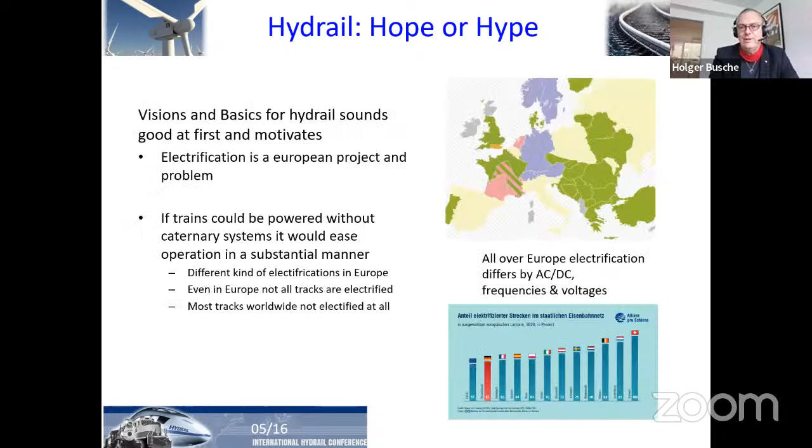But I just did an examination for a certain railway line in northern Germany, which is between two of the largest cities, between Kiel and Lübeck, and this line is about 80 kilometers long, which is equivalent to about 50 miles. I just calculated for this line how much renewable energy would be needed. So it's just one power station at that time.

How much would be the economic benefit for this, and how many trains will you have, as I developed a certain timetable for the railway operation, and so on. And is it possible to make the e-trains wireless, so going faster, better, and cheaper in comparison to a catenary system at the time? And even in those days, for the very few operations, so 2 trains per hour in operation over there, it would be cheaper, even with those prices of fuel cells at the time, to operate with hydrogen rather than building the catenary systems.

The thing about trains, in comparison to cars, is that you have a lot of advantages using hydrogen in a train, because the energy consumption of a train is much lower than of a car in comparison to their size. So that makes your technology easier to install.

The second thing is a car is just standing around more than 23 hours a day. So even if you install a quite expensive bit of technology into a car, and you just drive 40 kilometers a day, which is the average in Germany, of course this is more expensive than if you install something in a train, which operates 600, 700, 800 kilometers a day, or even more than 1,000.

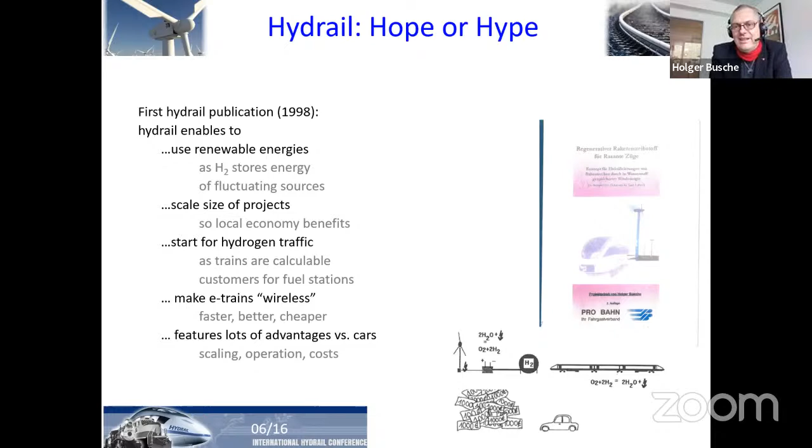Of course, you need less energy. This is also a second thing. Trains are always better than cars regarding energy.

The history. So actually, in the very beginning, I started by buying 2 old rail cars from the 50s, which had been operated by rechargeable batteries. The batteries were removed in the 90s in order to install a diesel engine. We wanted to have these 2 rail cars in some kind of competition between rechargeable batteries, of course new ones, since the older ones had been lead batteries, very, very heavy, and hydrogen.

So we started this in 2011 or 12. We got some first examinations and so on. I can show photos of these old rail cars, vintage rail cars. But nevertheless, 2013, 14,

Alstom came up with the idea of changing one of their standard diesel rail cars, the LINT 54. 54 stands for 54 meters of length. And they made up the project of having these converted to hydrogen. As you can see in the background here, a photo of those and the history.

So it started in 2014-15, and they had pre-series trains, again 2 of them, and started them on a passenger operation line close to Hamburg, which was part of the International Hydrail Conference in 2019. Then we had the start of the fleet operation, which was scheduled for the end of last year.

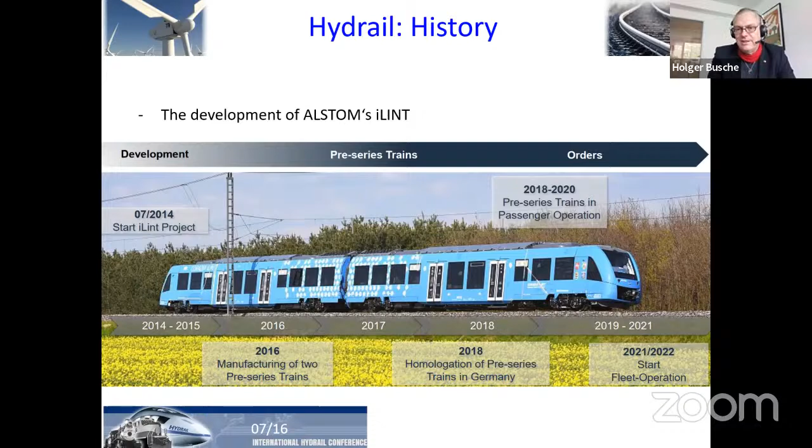And now next to Frankfurt, they're having a fleet in operation. They are facing problems; I will talk about this a little later on. But nevertheless, Hydrail is on the run. And we can see the first generation of hydrogen railways, which is this iLint. You see this is Lower Saxony, with Hamburg here at the top if you're looking at a map.

And what they are expecting is a range of 1,000 kilometers, with refilling taking just 15 minutes. You see some technical data in here, which you can see later in the presentations given to you. Of course, this is a hybrid, so they have a 110 kilowatt hour battery installed to shave the peak power demands, so the fuel cell doesn't have to cope with all these power changes in a short time, which fuel cells usually don't like that much.

Nevertheless, the homologation of the system was achieved. The train was in operation with a big opening, and on schedule with live passengers on that line.

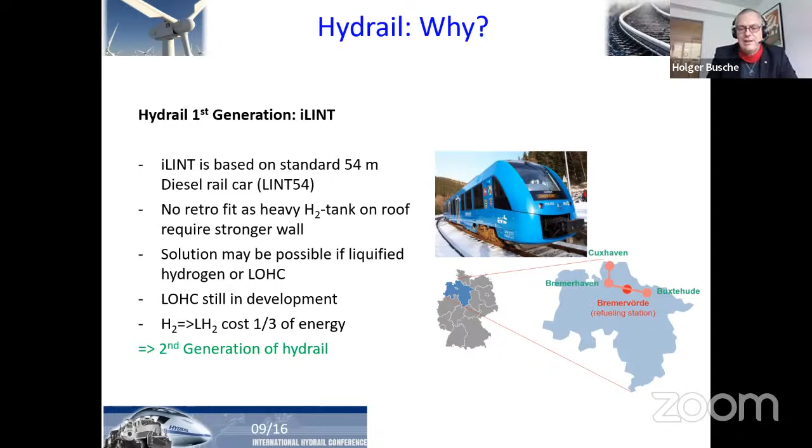A little later on came the second generation, the Mireo, which is a standard train of Siemens. Siemens is designing these trains on the basis of a standard electric rail car. So that's a difference. The iLint is originally a diesel hydraulic rail car, so there's no electric propulsion system in the original version, while this one is usually powered with a catenary system, which gives you quite some advantages because you have the electric engine and so on already installed.

Siemens developed both versions, the B standing for battery, or rechargeable batteries, and the H standing for hydrogen, of course. You see some more data in here. They're trying to achieve the same filling time, 15 minutes of refilling for hydrogen, and especially they are able to connect with the other trains of this kind of fleet. So a catenary system train should be connectable to those hydrogen trains.

So if you have a hydrogen line coming from a rural area, for example, getting closer to a metropolitan area where you have a catenary system, then you can just connect them and people don't have to change. It's just to connect the catenary system to this.

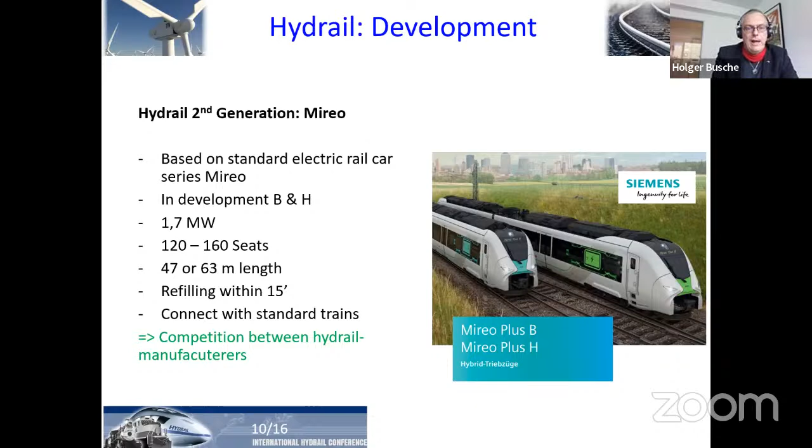This brings up the question: when should we use a catenary system, rechargeable batteries, or Hydrail? And the decision will be made by CAPEX and OPEX, of course. Usually it's the money that makes the decisions at the end of the day, in the long run, which in railways is usually decades.

Catenaries are, of course, the most powerful trains, but you have a high CAPEX. You have to invest a hell of a lot of money, which in Germany is something like 2 million euros per kilometer to install an overhead catenary system. And in North America, it's even much more than this, as the trucks are larger and all those kinds of problems you face over there.

So if you have low range needed, because you only have at the end a line of 20 or 30 kilometers that you have to cope with, then you go for the rechargeable battery because you can use the catenary system on the main line, for example. But if you don't have this and you have to go with your train on a longer run, then Hydrail is coming into play. And also here, the decision is made by the range and, of course, by the money at the end of the day.

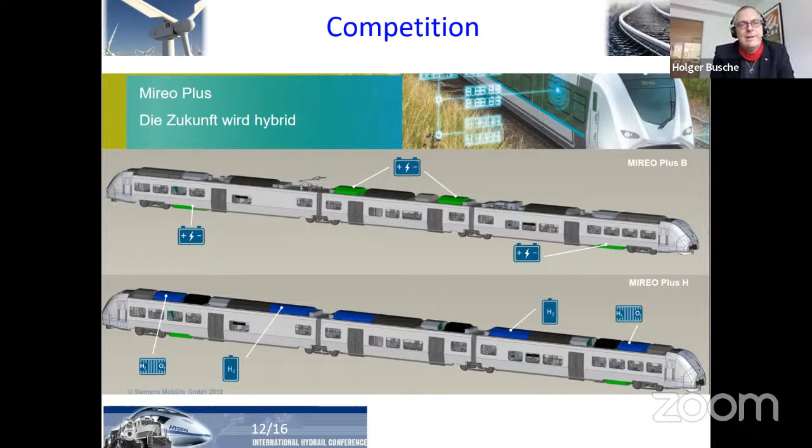So it's based on this question: how many kilometers do you have in between your catenary systems, if you have some? And the range is usually something around 80 kilometers. So you can fill up a gap between the catenary systems of 80 kilometers, or 40 kilometers return. The technology is also feasible. These kind of trains will be in operation in northern Germany, Schleswig-Holstein, starting this year. So it's coming up, and this question will be coming up more and more.

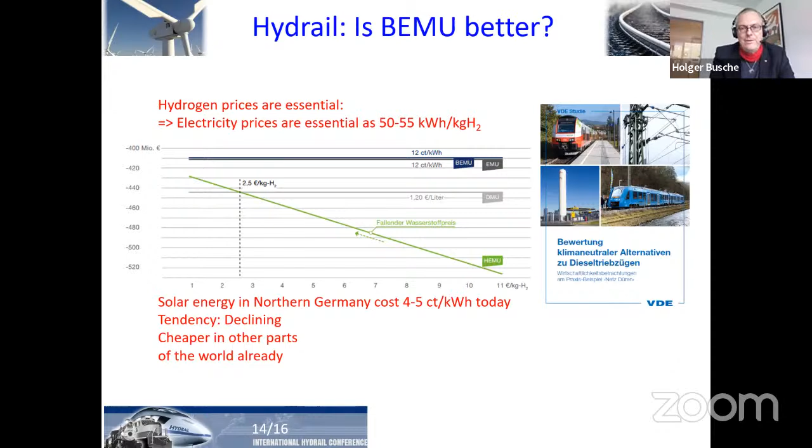And even the 12 cents per kilowatt hour for the catenary system is no longer the price that you pay today. So it's going to be interesting where this race ends up at the end of the day. So Hydrail chances in Germany are limited. This is due to the fact that 60% of the railway network is electrified, so it doesn't make that much sense to have a Hydrail train in operation underneath a catenary system.

Hydrail is facing a big problem, as hydrogen is not just an energy source that you can withdraw from Earth, like oil or coal. You have to produce it, and the capacity to do so is limited at the moment. So it won't be a problem in 2050 or so, but it's a problem now. And hydrogen will be urgently needed in different uses like the steel industry.

So today, if you have iron oxide to be reduced, you usually use coal, and that has to be replaced by hydrogen. And you can imagine that a steel factory needs a hell of a lot of hydrogen to produce their steel in a green way. The chemical industry, of course: everything that is made of plastic has some kind of hydrogen included. So the question is how much hydrogen will be available in which area at which time.

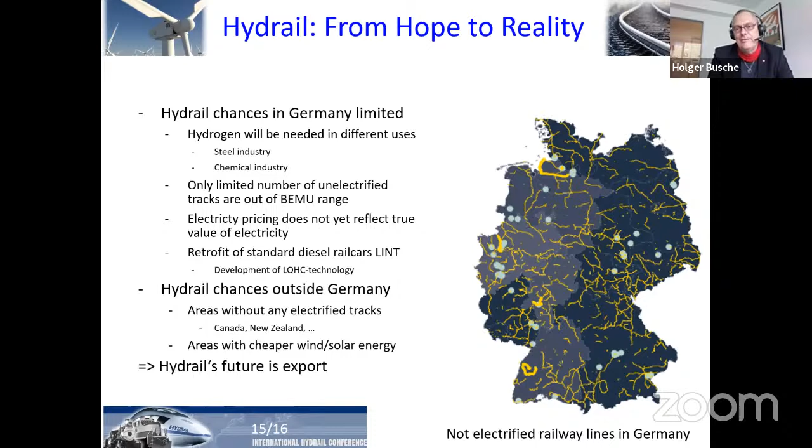And you have, of course, areas with cheaper wind and solar energy. Germany, especially the north of Germany, is a bit rainy, but we have wind, but there are countries where you have lots more wind and solar energy. So Hydrail's future is going to be the export, not the use in Germany. That's my prediction on this, because the electrification and catenary systems are quite far along in Central Europe. But in other countries, we don't see this. At the end of the day, Hydrail will have a good future in the world, but maybe not that much in Germany.

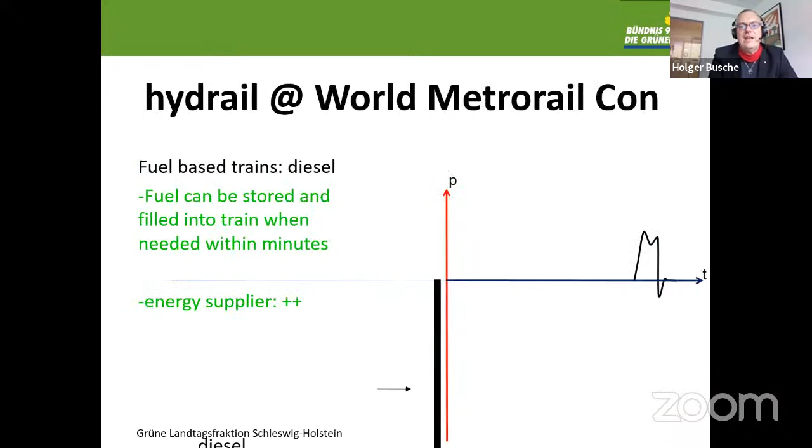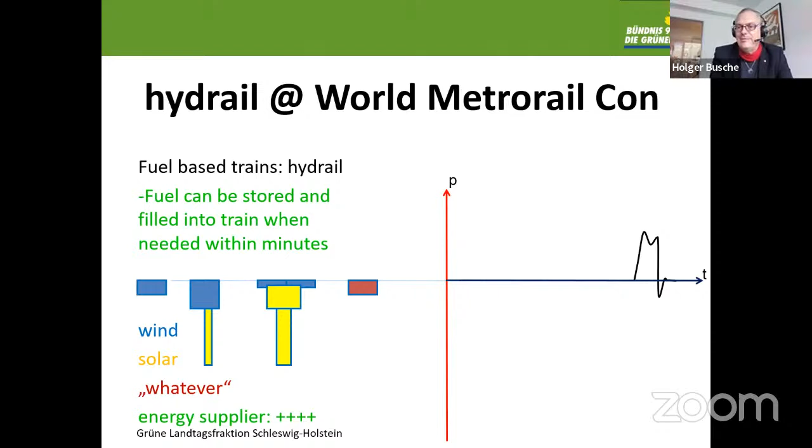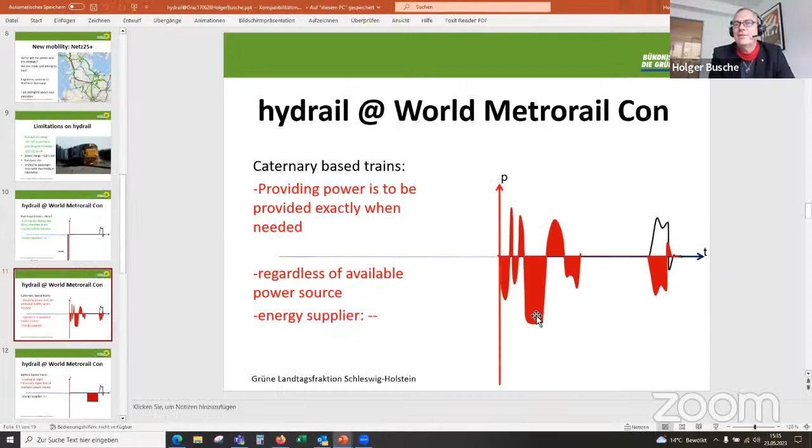The problem is that the production of wind, solar, or whatever, is producing at a time when you don't need it. If you have a catenary system, you always need the power in the moment the train starts. And with hydrogen, you can always jump into the cheap areas of production, getting much cheaper electricity, because you can sell the electricity at the moment when it's needed at higher prices to the grid. So somehow benefiting from higher prices in the grid to reduce your cost of producing hydrogen.

That was very insightful. Next question: how does CAPEX, investment in Hydrail, compare to other decarbonization options in the transportation sector? In the transportation sector at all? Yes, the CAPEX on the train is not that much in comparison to CAPEX which you would install into a truck or a car. A car costs about, say, 50,000, and just a small rail car costs you 5 million. So 100 times. But this hydrogen system is not 100 times the price of the hydrogen system in a car. Trains have a big advantage here in comparison to whatever, especially cars.

Are there specific regions or contexts where Hydrail makes more sense than alternative low-carbon rail solutions? Why or why not? As I showed with the range picture, the different kinds of decarbonization processes or chances are given by the range. If you have no catenary system available, there is a certain distance which you can cope with rechargeable batteries. Beyond this, you will face the problem that you're only transporting the battery anymore.

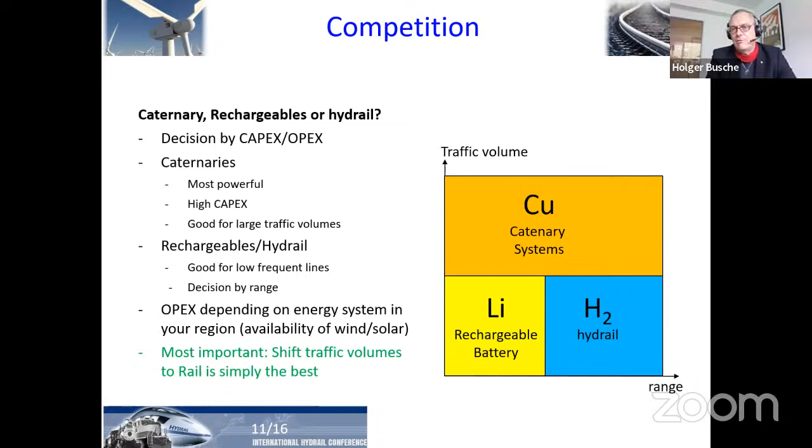So this LOHC is about 1/3 of the energy density in terms of volume of diesel. So imagine if you just have to increase a diesel tank in a locomotive, that can be easily done, especially as the fuel cell and all the other components of that engine will be smaller than the diesel engine of a 3 megawatt diesel power engine. So the range is 80 kilometers for the rechargeable batteries by now. It might be a bit more later on, but if you go beyond this, well, you have no chance for the batteries.

Okay, and next one, I think you already partially answered this, but what are the critical policy and infrastructure requirements needed to create an enabling environment for the widespread deployment of Hydrail? In the beginning, if you are in Germany, for example, if you have an authority that wants to hire local traffic, which is usually hired by the local authority, like the province of Schleswig-Holstein, or other provinces in Germany, you have regional authorities that order train traffic. So if you get them to order Hydrail instead of diesel, then you've got the first step done already, because you're making up the market. You have somebody who's buying that stuff. That helps quite a lot.

Again, if you are not in these conditions where you have somebody who is hiring local traffic, you just have to be self-sufficient, then it's needed to have the energy side in a way that hydrogen is becoming cheaper than everything else, especially diesel fuel. And which is easily possible if you include the climate crisis costs into the diesel.

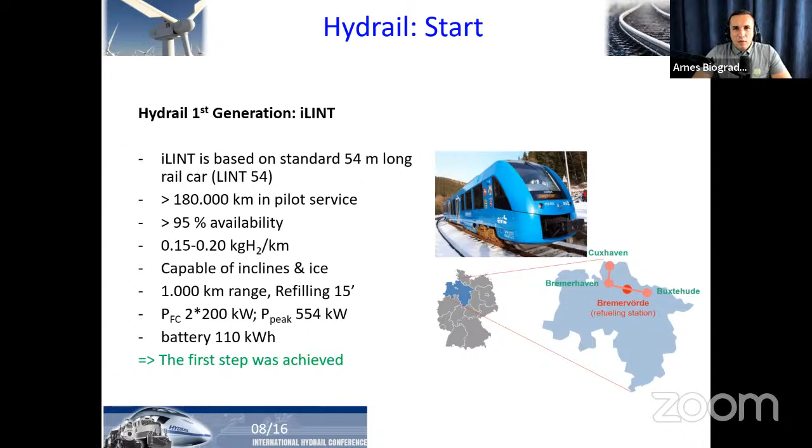Thank you very much, and get it out there, because we definitely need the change away from the fossil fuels and the nuclear fuels, because we need wind and solar energy in all of the industry and transportation modes. And of course, at the end of the day, trains are better than cars and trucks.